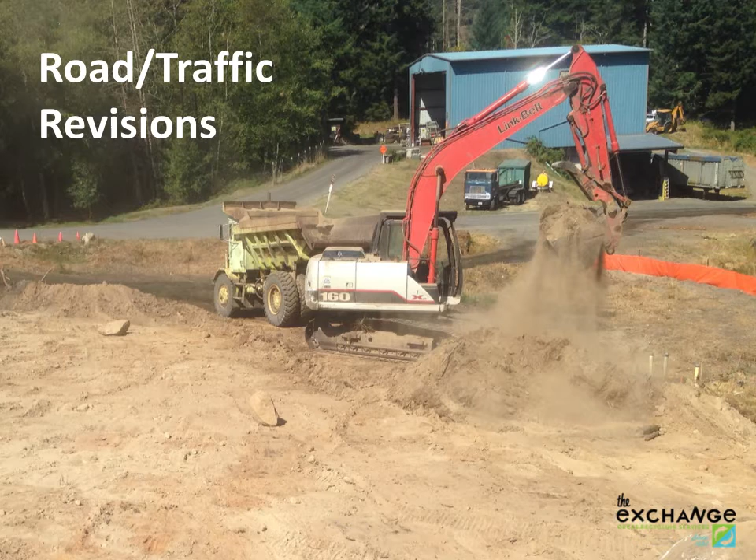As part of our contract with San Juan County to take over the transfer station, we were required to improve the traffic flow and safety on site. After a great deal of planning, that work has begun. Island Excavating, who also happens to be our next door neighbor, was the winning bidder in the competition for the job. They started in early August, and we expect them to be done in late October.

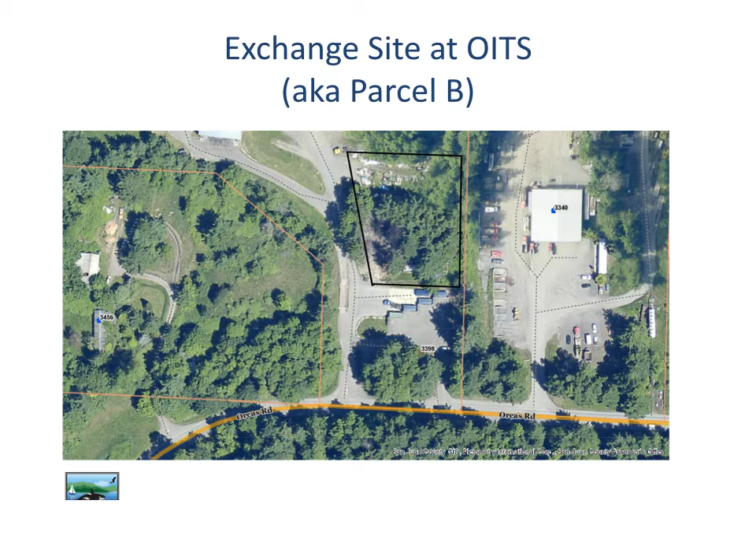This is designed by Terrell Chang, our expert engineer, a guy who professionally does transfer station design. What it does is keeps cars off of Orcas Road. It allows queuing on site. The ingress and egress is safer. You don't go back out onto Orcas Road to go around to the payment booth any longer. It'll also help with our future plans for recycling, and there's lots more parking for the exchange.

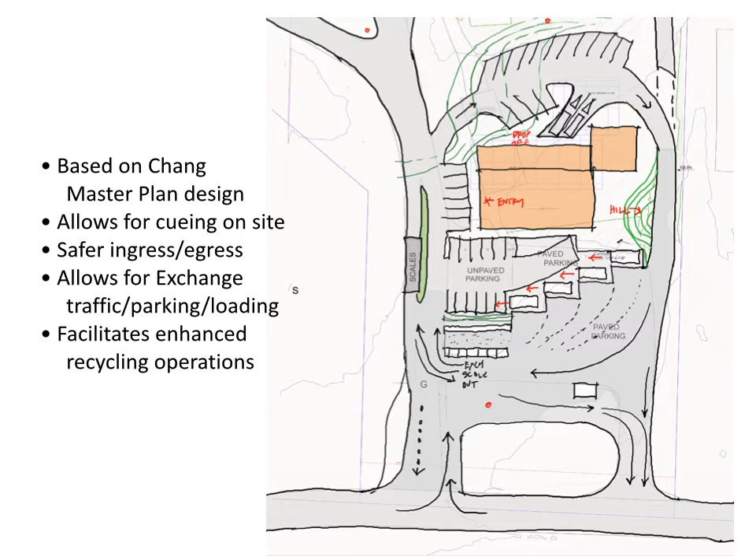So we got our permits in early August and construction's underway. Island X got the contract as mentioned, and we expect to complete in October. We did get some financial support from San Juan County and from Orcas Island Community Foundation and donors. We are also funding a significant portion of this project.

But what people really want to know is, when are we going to have a new exchange?

So what have we been up to? Well, for the past 2 years, we've been working very hard to get to a new exchange, and that included cleaning up after the fire. A significant amount of material had to be removed from the site, as well as trees. Much of that was accomplished with volunteer help as well as staff time.

We did explore an off-site option for a new exchange. That didn't work out. We're back to our original home on the county property. We've also spent a lot of time on operating policies and procedures so that this new exchange will operate efficiently. And we more recently have just been working on building designs, and we're going to share some of those with you in a moment.

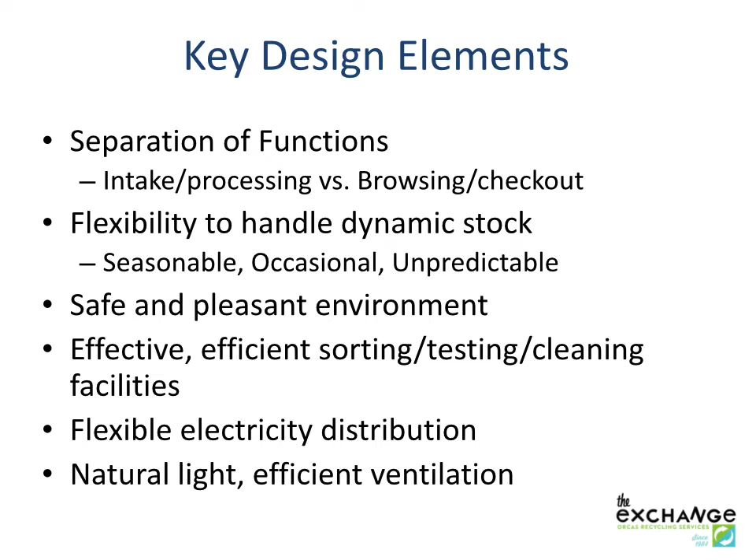Shortly after the old Exchange burned down, we had a series of public meetings in which we discussed concepts for a new Exchange. And out of those meetings came the big roof concept - very simply speaking, as much covered space as you can get for the dollar.

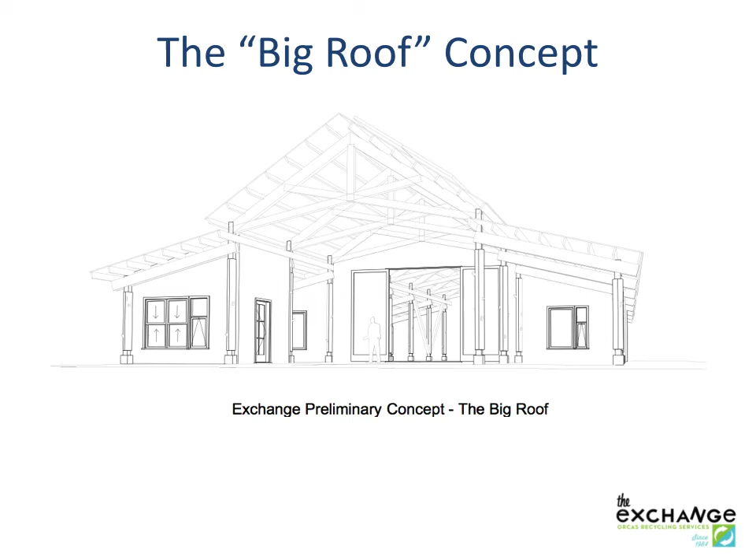As this design was driven by the size and shape of those trusses, it required a lot of posts, columns, and interior walls, and we decided that an open floor plan was going to work better. Also, as we moved down the road design process, we found the footprint that we had for the Exchange was changing, and that this was not the ideal shape of a building for the platform we were going to end up with.

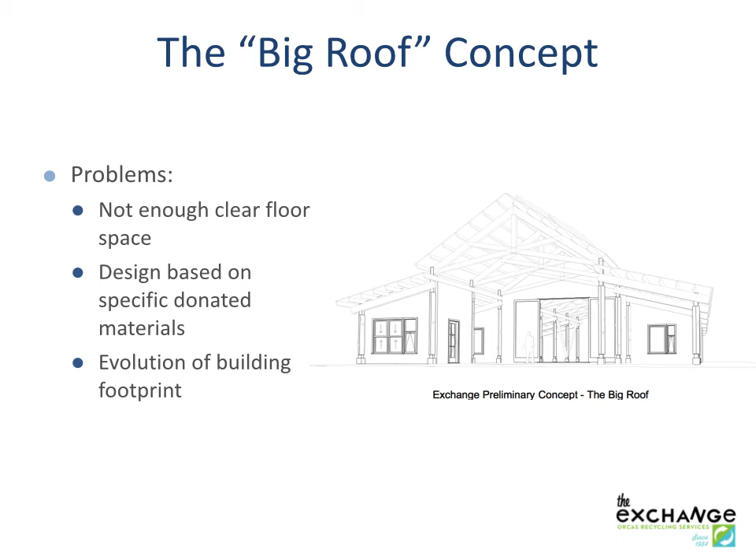As impermanent, it would undoubtedly have to be removed later for some other more permanent structure. It would be difficult to build and arrange storage facilities, shelving and so forth within the long containers. And ultimately, this may not have flown at all because it's very unclear that we could have had it engineered and permitted by the county. And again, it wasn't ideal for the footprint that we were going to discover that we had.

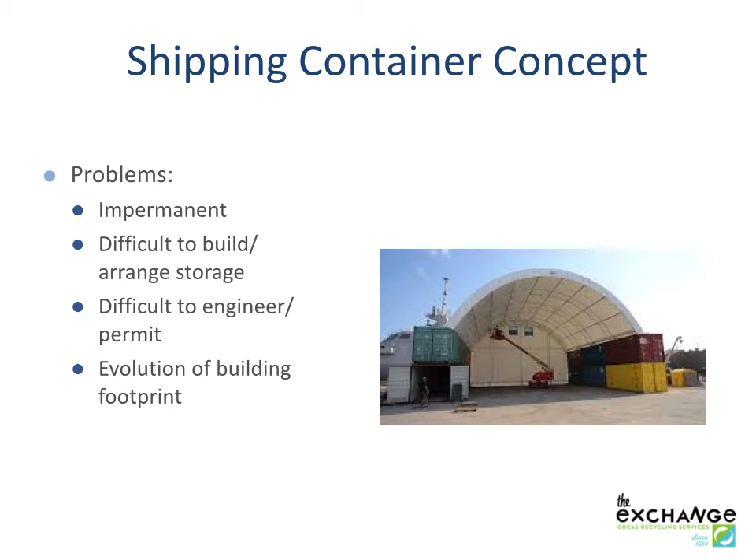So what do I mean by that building footprint? Well, let's take a look.

So it turns out that when you build a road to state and county specifications, you're confronted with lots of restrictions and design requirements having to do with turning radiuses and weight loads and dimensions of parking spots, the number of parking spots, and the number of trees planted in between parking spots, things like that.

Once we had an engineered road, we saw that our footprint for the exchange building was quite a bit different than we expected. After looking at that for some time, we came up with this, the two-box concept, and that's where we are now.

This will give us one large building on a concrete slab of about 60 by 80 feet, pretty big - that'd be the main exchange building, unheated. And then we'd have a small heated structure to the northeast there, the annex, which would have an office and bathrooms and potentially a meeting room / workshop.

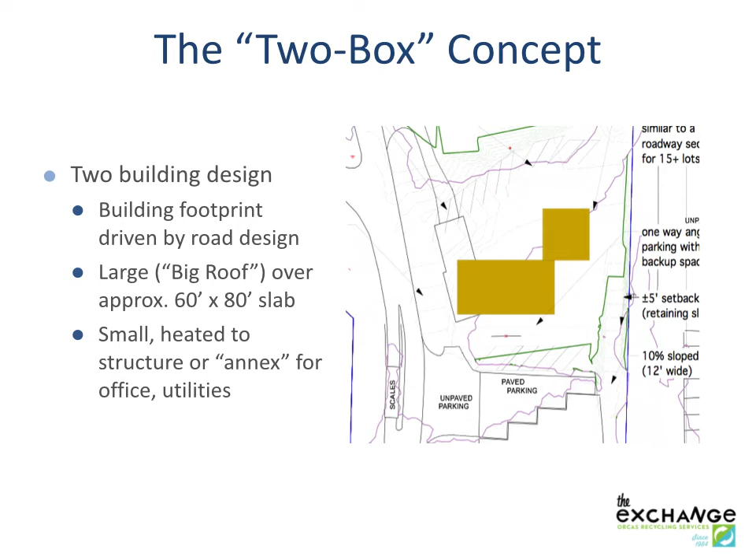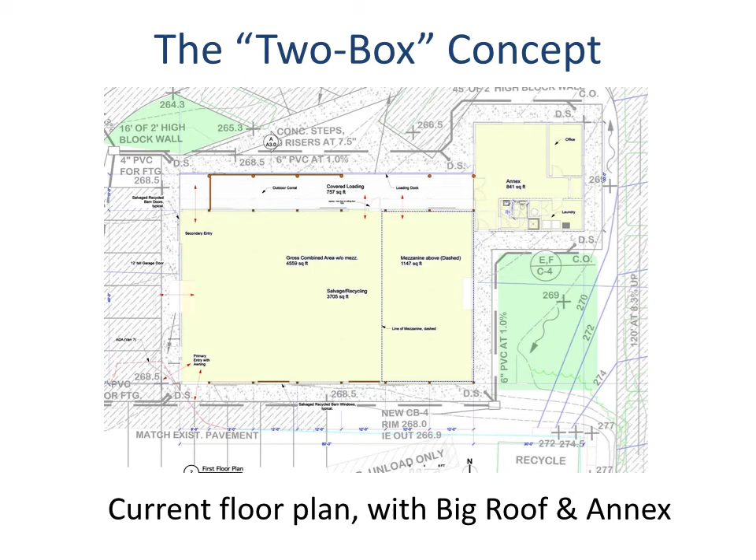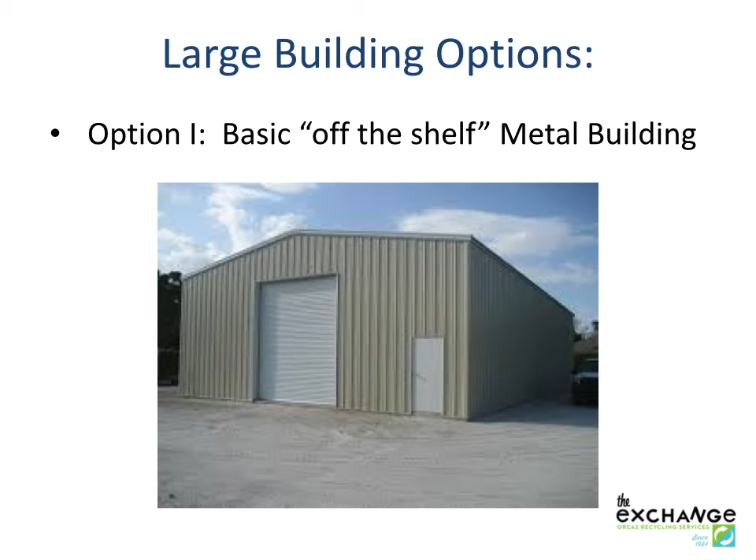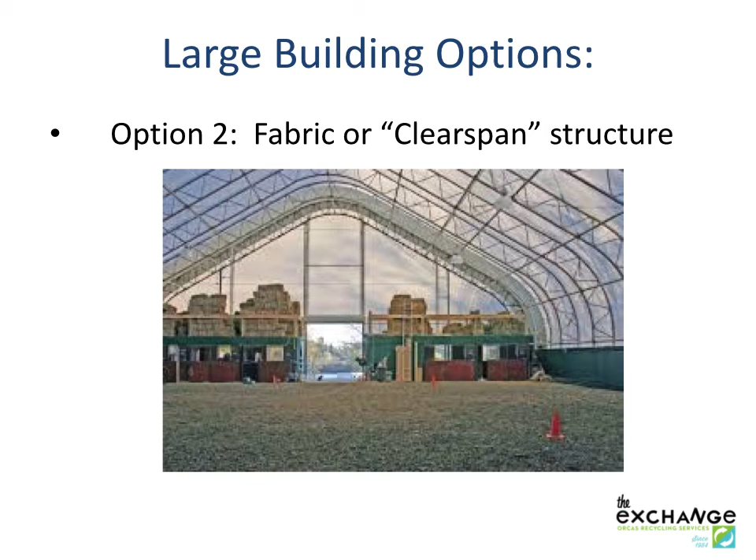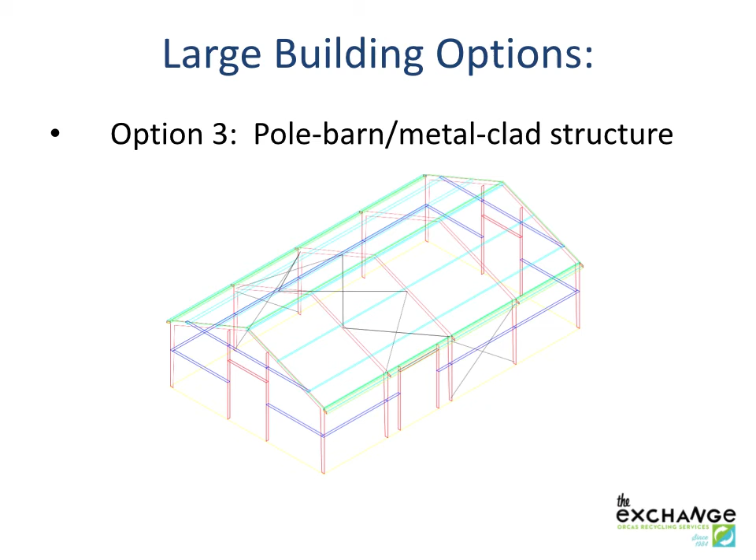So what kind of building should we put on this new footprint that we've discovered? Option 1 is your basic off-the-shelf metal building. Option 2 is your fabric or Clearspan structure. Or option 3, which is a kind of hybrid pole barn metal building. And there's kind of an option 3.5, which is the pole barn metal clad structure with a shed roof.

It is possible to do this in an all metal building as well, but right now we're kind of leaning towards this model here.

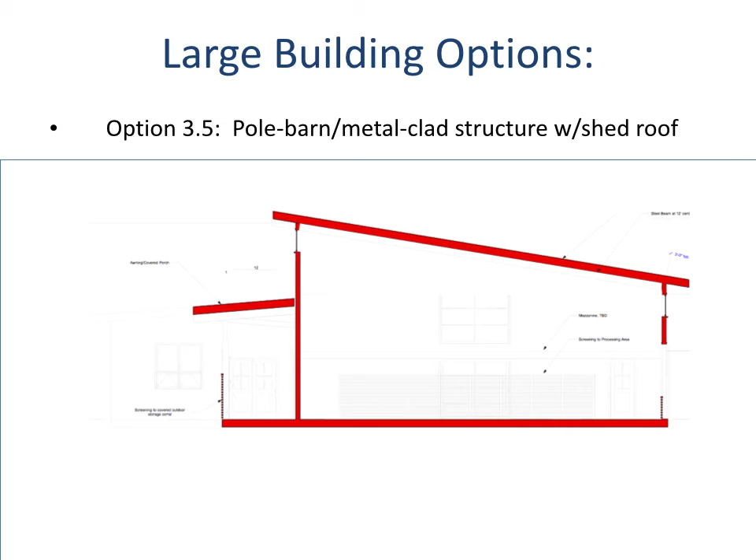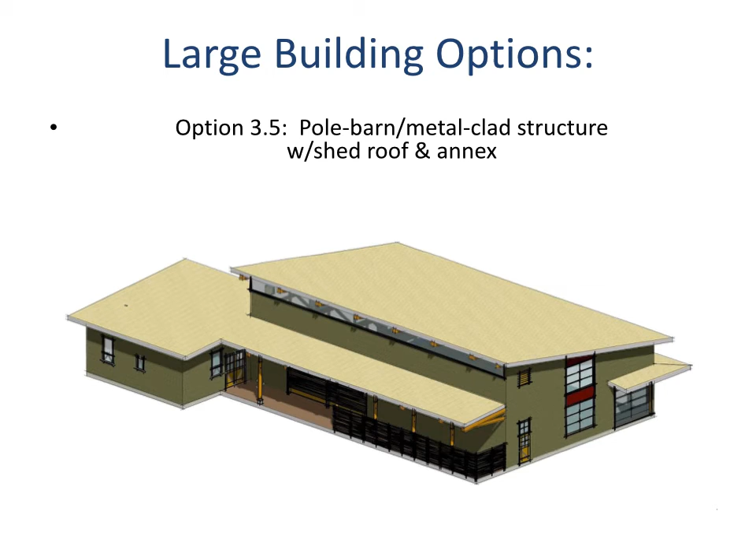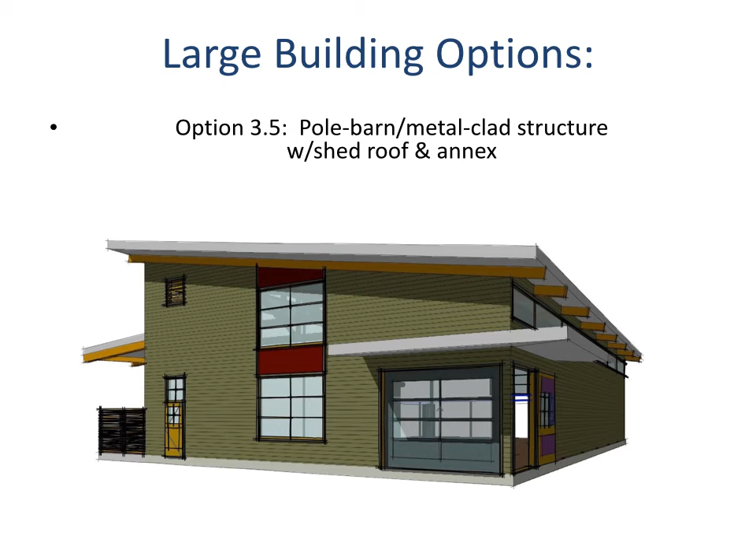So how do these different building styles stack up when you look at the dollars? Well, the off-the-shelf metal building estimate we have, and these are hard costs only, came in at about $408,000, $72 a square foot. The fabric clear span version, $387,000, or $69 a square foot. And the pole building with the shed roof and annex came in at $440,000, $78 a square foot.

It's worth pointing out how inexpensive all of these are per square foot when you look at the cost of building on Orcas Island. The cheapest house I'm aware of being built here in the last several years was in the 200 to 250 a square foot range, so we're doing pretty well.

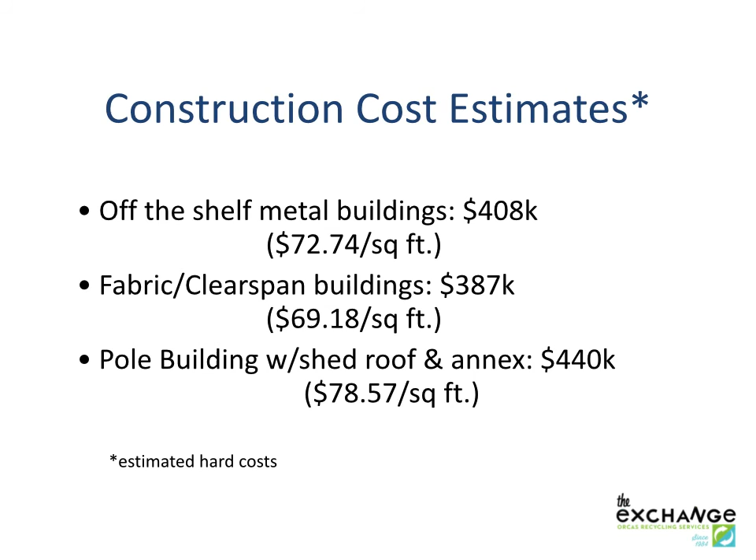So what are the next steps? Well, certainly we have to finalize our building design, and as a matter of fact, since this presentation on August 25th, we have been made aware of another metal building manufacturer that we are currently in talks with. But we will get the design finalized very quickly, as well as finishing our engineering, and we will apply for our building permits very shortly.

Once those are in, we'll know who our supplier is, and then we'll be talking to local contractors to see who's going to assemble the building for us. And hopefully we will start as soon as the road is done. Very shortly, in early October, we're going to launch a fundraising campaign, because we're going to need everybody's help to make this happen.